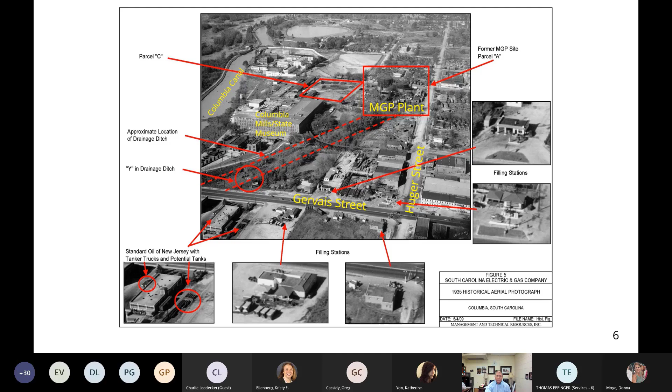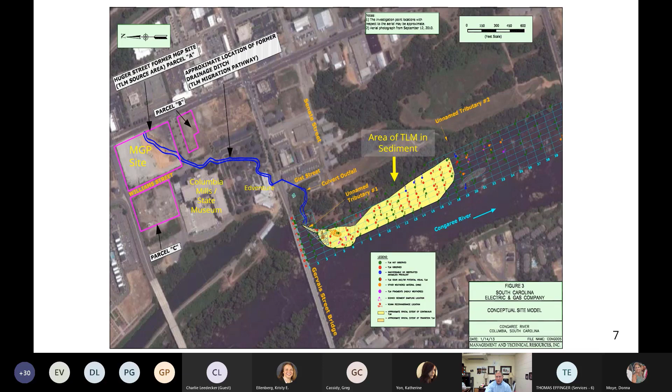So this project naturally has a lot of challenges associated with it, other than just being in a very dynamic river and having to try to get the material out of the river. The river itself has a bedrock bottom, so the typical way of driving metal sheet piling to create a watertight environment to excavate material is not available. This was also during the Civil War, where Sherman, when he was burning Columbia, dumped unexploded ordnance from the Civil War era Confederate armory into the river in approximately the same location here. So there's the issue with potential historic relics and artifacts and potential for unexploded ordnance underneath the coal tar material that we're trying to excavate out.

And due to sturgeon spawning, there's also limited time frames for work in the river. So you don't get to work the full year round to remove this material. So there's a lot of challenges that face doing the remediation at this site.

But after a lot of careful consideration, the selected remedy for cleanup is what is commonly referred to by the department as the modified removal action. And this alternative will remove about 70-75% of the tar-like material from the river. It will remove it from the areas that are most commonly recreated. Some material will be left in place that's in much deeper areas of the river that are not easily accessed. And then this removal will be split into two portions, which we'll see in the coming slides as to what that looks like.

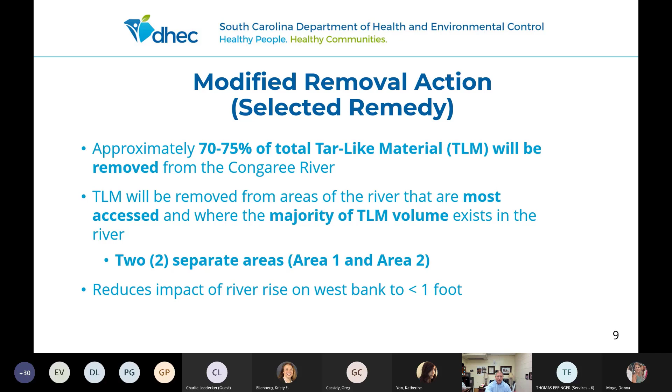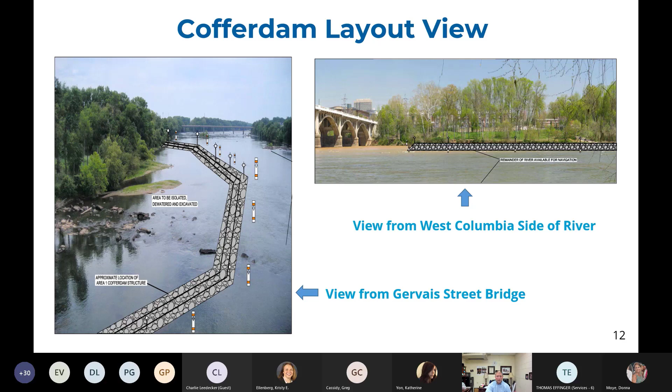From a design standpoint, the cofferdam cannot be designed not to be overtopped because the water level in that river moves a lot. There's a lot of variability. So the cofferdam has to be designed to safely overtop, be able to drain the water out of it, and then begin excavation again once the water has been removed. So it will require some piping to be put in to allow water to drain out of the land side of the cofferdam once the river levels have gone down to a point that can be done.

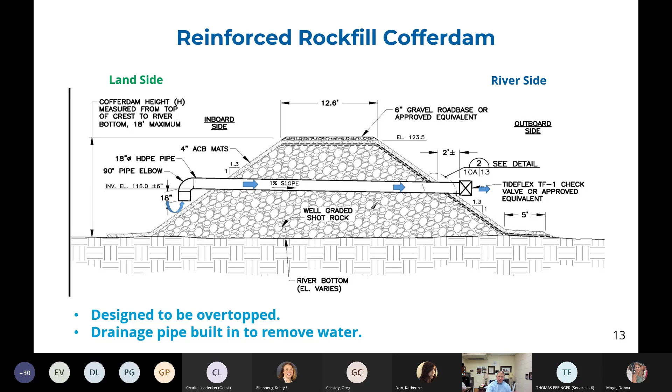There will also be a rather extensive water treatment system put in place to treat water that comes in contact with the sediments behind the dam when it's overtopped. But the design of the cofferdam is made so that it can sustain the overtopping events that, looking at the historical trends, will happen through the course of this project. To help prevent any erosion, some concrete mats are going to be placed over the dam once it's been constructed. That just helps hold everything in place.

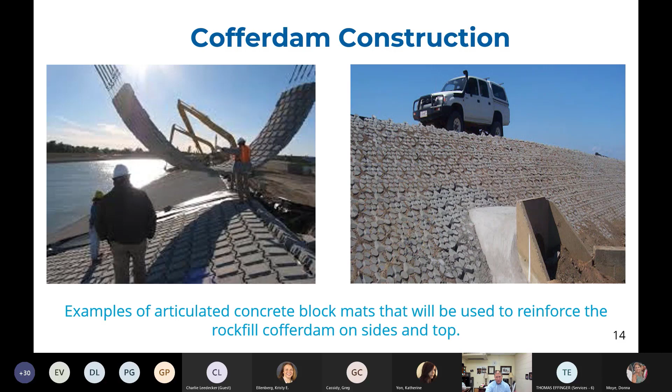So some of the good things that have happened since our last meeting: in December, the Army Corps of Engineers issued their nationwide 38 permit, and DHEC's Bureau of Water issued their certificate to construct under the Army Corps of Engineers permit. Those were the major permits that were outstanding that we were waiting on to move forward with the removal, and that we promised to come back to the public once those achievements had occurred.

In February, DHEC signed and executed the action memorandum to document the selection of the modified removal action as the cleanup alternative of choice for the site. And then in March, Dominion worked with the Army Corps of Engineers to do a recertification of the nationwide 38 permit that they had received in December. That was a technicality of where the issuance of the original permit came in the time frame that the Corps is allowed to issue those type permits. But from that side of permitting, all of those are now in place, and we're ready to start moving forward.

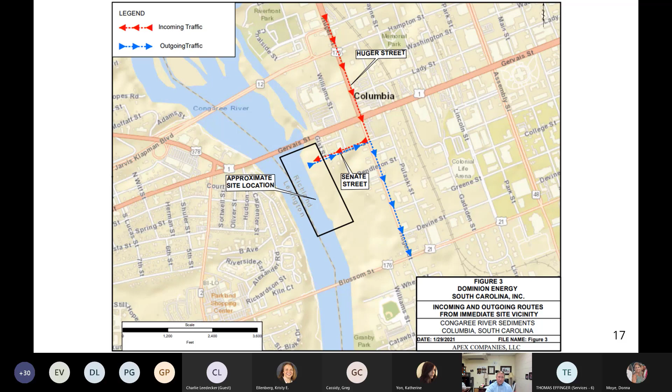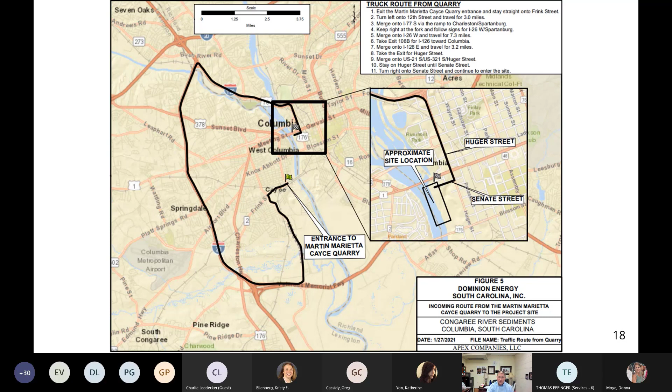The next figure shows a little bit better the route from the quarry. This is where the rock will come in from. They'll exit from the quarry, they'll come out to 77, they'll get on 26, they'll come up to 126, they'll come down Huger and on to Senate to bring the material in, and then to exit, they'll go out Senate to Huger, down Huger, across Blossom, and back to the quarry. Similar route for trucks taking the sediments out, only they will come back down and connect to 77 and take it out to the landfill.

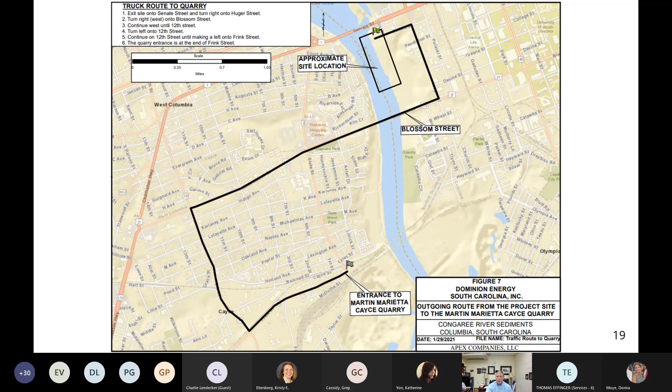Now, knowing that there's a lot of material to be brought in and a lot of material to be brought out during this process, Senate Street is a good access point, but we do not want to completely disrupt Senate Street during this process. Dominion's looking at a likely staging area at the former MGP location, which is a couple blocks up from the site. The site's down here near the riverfront part. So they would come down Huger, come down Senate, and then back out.

And the purpose of this would be to limit the number of trucks on Senate Street at any one time, prevent them from backing up along Senate and causing a nuisance, and really allow traffic to continue to flow down those areas. So the trucks that they could get into the work area to get the material out, they'd bring in, they'd stage the rest, and as they got those out, they'd bring the next group in. That's the conceptual plan at this time.

So going from there, there's a lot of things that have to happen in a very constricted time frame here. We had hoped to receive the permit from the Corps much sooner than we did. So we're pretty much going wide open, trying to get everything ready to get out in the river this season and not lose the season. So Dominion is in the process of their contractor selection. That's kind of the first step.

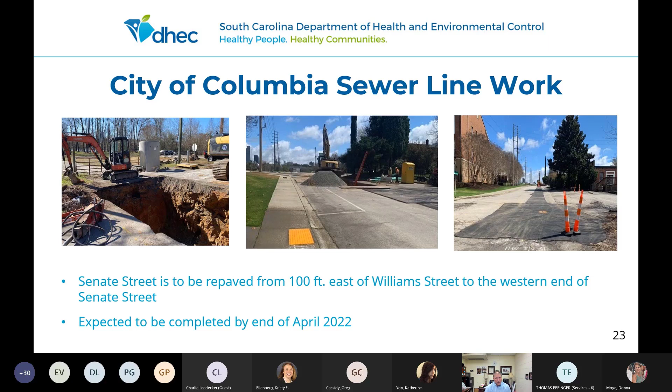So I've mentioned it a few times, this is kind of the next piece that's got to happen to help determine how the construction is going to move forward. Dominion's proposing to look at some simulated truck traffic and measure vibrations, get some background levels for a few days of the normal traffic flow, and then use all this data to help determine what's the optimal conditions to bring these trucks in so that those can be adhered to during the construction.

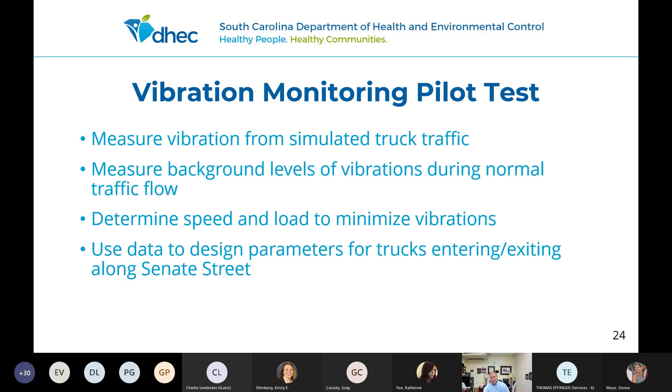So that kind of brings us to our path forward, where we are, what's going to happen next. Dominion's going to select their contractor soon. Once they've done that, they'll submit the work plan. Once DHEC has reviewed it, gotten it to its final state, we'll approve it. And with that, that will kick off about 2 to 3 years of construction and removal.

The main point that we wanted to bring out is coming as soon as May, the river access down off Senate Street is going to start to be restricted, and it is no longer going to be an accessible access point because of all of the construction activities that are going to be set forth to do this project.

And the hopes are that we're able to really get this kicked off come summer of 2022. And we are going to continue to populate our website as things are happening, as plans come in. Our website down here has all the documents, all the correspondence that we have with Dominion moving forward. As those plans come in, if you want to see them, we will be getting them on our webpage.

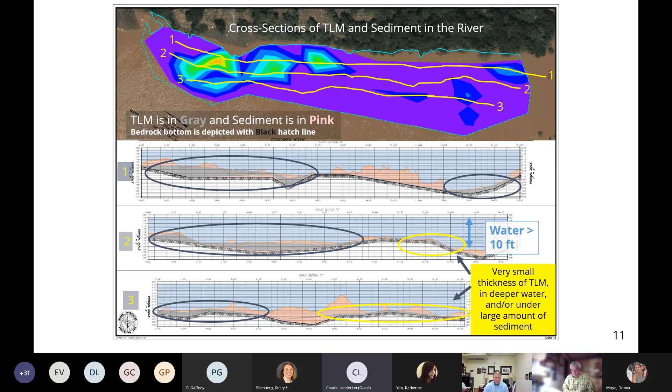Thank you. The last article I saw in The State quoted the total cost of this project, 17 million or something like that. And I'm not sure where the number came from. It may be 8 years old, but I'm curious about what the total cost of this is when you put together the removal action, the UXO contractor, the archaeological contractor. And you have 3 bids now. Are any of the bids under $20 million?

Yeah, hey, this is Tom again. Yeah, so we're still reviewing those bids. It's a sealed process. We don't discuss the bids until we get through that process. But looking at the overall cost, yeah, that 17 million likely is an old number. We're continuing to refine that number because it's not only, like you said, the people in there with the yellow iron doing the heavy equipment. We'll also have security, cameras, office trailers, discharge to the POTW. There's going to be additional costs. You're right, Charlie, but we don't have the all-in cost yet, but we're in that ballpark. I'll just leave it at that.

The other thing that we're up against is we don't know how often the river's going to overtop us, set us back. So there's going to be charges with delays while we wait for the river to subside, additional pumping costs, water treatment costs, those kind of things. So they're going to continue to accumulate. I would guess it's going to be a little north of 17.

Thank you so much for that. I do want to make sure that we're getting back to you, Mr. Gaffney, but before we do that, I have a Michael Mayo. Mr. Mayo, do you have a question? You just unmute your line.

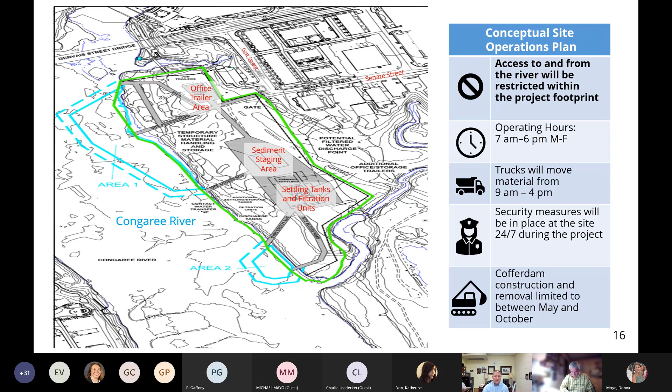With the cofferdam, we are limited to constructing between the months of May and October. So if we construct and we're not able to complete the removal in phase 1 this year, if we're not able to take all that material out, the safest play would probably be to just leave it in place to the next season rather than take part of it out and run the risk of having issues with that. But area 1 would be constructed, the material removed, then that cofferdam removed, and then area 2 would be constructed. Does that clarify your question?

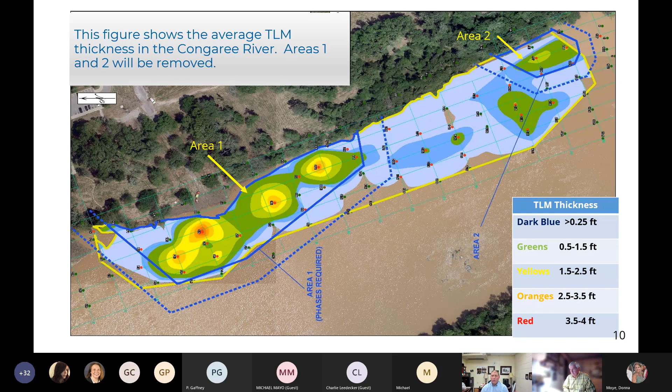Basically we have a situation out there where we have tar material in an area that's frequently recreated by a lot of residents in Columbia, West Columbia, all around. Especially come summer season, that's a hot spot of activity. Through our process, we evaluated where's the contamination, what is it, and what's the best way to deal with it. And in all the projects that we have dealt with Dominion on, and we've had a lot of MGPs across the state, their preference was always, if we can remove the problem, that's the best way to go. That's why we saw 140,000 cubic yards removed from the manufactured gas plant.

If this is left here, it's going to continue to be a nuisance and a problem for a long, long time. Is it harmful? We're not seeing it in the surface water. There's periodic surface water sampling taken. But we've gotten a lot of reports of people getting into the tar. What do we do when we get into the tar? If people are washing it off right when they get it on them, there's probably not a huge concern. But the reason we're going after this material is there is some risk associated with it.

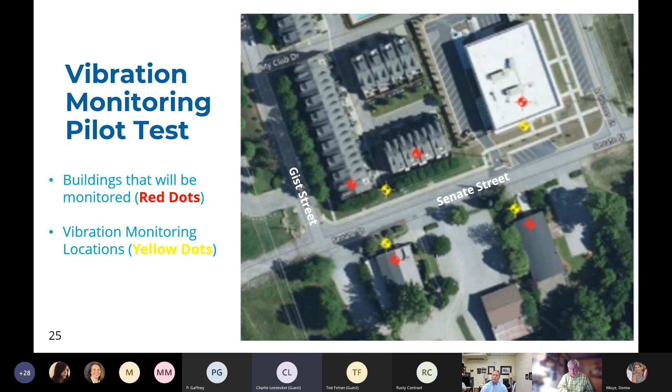Yeah, so we had hoped, beyond all hope, that we would have gotten a Corps permit spring of last year. That would have been ideal, which we didn't. We had hoped we would get one by June of last year, and we did not. Then we were hoping for September to be able to keep us on track for having a timely start this year. We are behind the 8 ball to get started this year. There are lots of other permits that come after the Corps permit. Lucas talked about a couple of those.

We've punched the clock with DHEC on getting their permit. The Corps actually had to reissue their permit because Nationwide 38 only lasts for 5 years. And this year was the year it was due to expire. They had to reissue those. We had to resubmit to them. We got the Nationwide 38 back from them actually just March 16th.

We were trying to get a contractor in place. We have to line up things with the POTW for that contact water discharge. We're working through a construction stormwater pollution prevention plan permit. And there's just a whole myriad of things that we need to go through and get done, as well as get our contractor in place. It's likely that we won't be in the river till at best June, perhaps July.

Like Lucas talked about, if we can get the cofferdam built this year, that would be great. We have to put that reinforcement on it. If we can get it dewatered this year and survey for the unexploded ordnance, that might be a win for this year. And then that cofferdam's going to sit there because it's built and the area's been surveyed. And so we're ready to do the excavation.

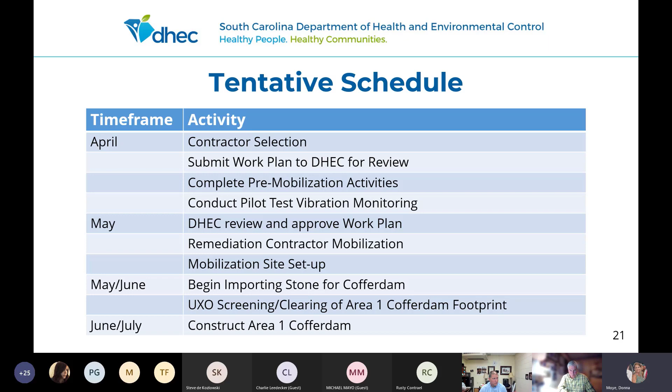Thank you. So I do want to be mindful of our time. It is almost 8 o'clock. Even at home, I know that sitting in one spot for that long can get a little tiresome. So I do want to encourage you, if we haven't heard from you yet and you have a question, please feel free to ask now, or as always, follow up with us after the meeting. But if you have a question, now's the time to raise your hand to let us know. And if we don't see any other hands, Mr. Leedecker, I know that you have another question. Maybe if you could ask one more question, and then if you have any more, follow up with us after tonight, we'll be glad to answer the remainder of your questions.

Yeah, final question, sort of related to Mr. Mayo's. The archaeological processing of the material, it comes out of the river, and then it's going to go to a processing site somewhere. Do you guys have a location yet where that is going to be? I'd say that the conceptual idea is that the majority of the screening for artifacts of this material as it comes out will be conducted in a designated area at the landfill. There will be some processing capabilities near the site to potentially do some screening if it needs to before the material's taken to the landfill. But the majority of it will be done in a staged location over there.

Tom, you got anything you would like to add to that? No, that's essentially it. It is important that we're able to move that material so that we can keep the production going to be able to get this sediment out of the river. We're going to catalog the area that it comes out of so that at least they have some kind of reference to document where it came from, which is important. But it's all about trying to keep the production going, allow the time that they need to do that archaeology work, and do it right.